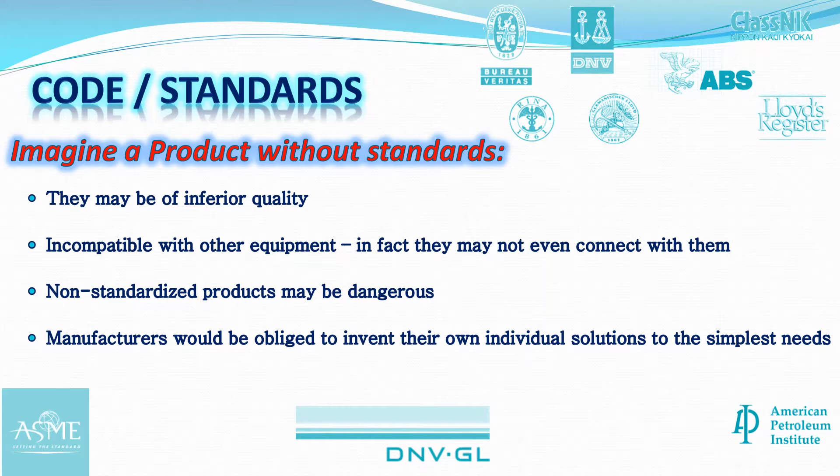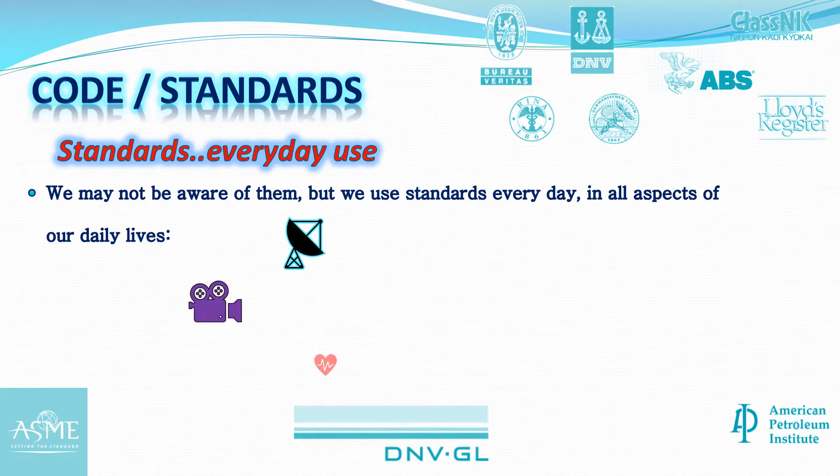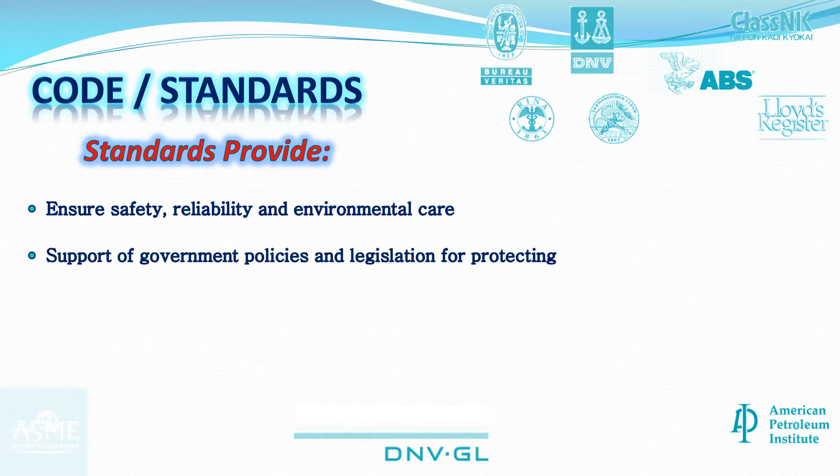We can find the standards in all aspects of our lives, in communications, media, healthcare, food, transport, construction, energy. So, what do standards offer to our products? We will have a safe product that was built according to verified quality. The production process will have less impact on the environment, as it uses proven technology and materials. Governmental bodies usually adopt standards and put legislation to incentivize their application, to protect both users and business interests. The unified product specification opens up market access and provides economies of large-scale production.

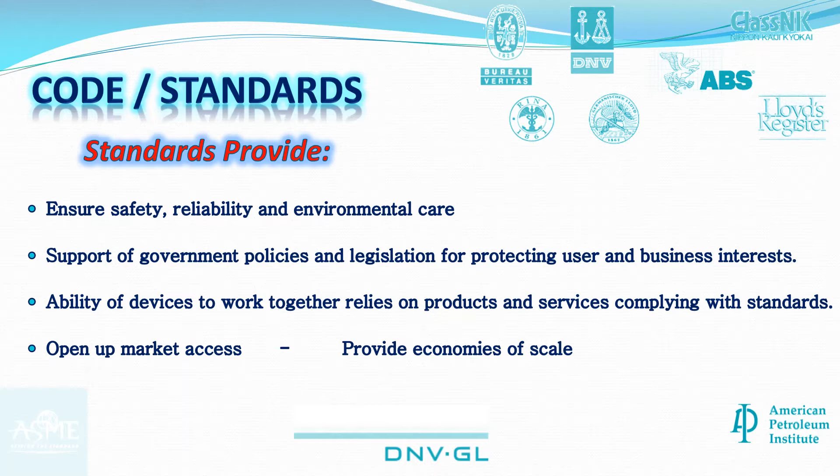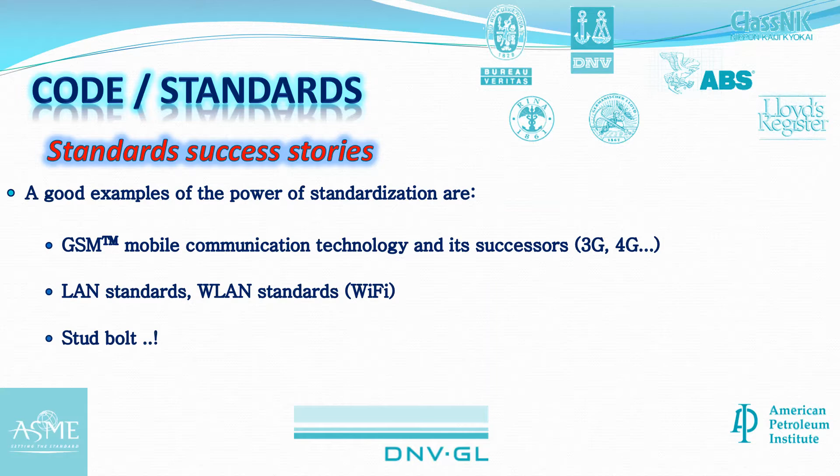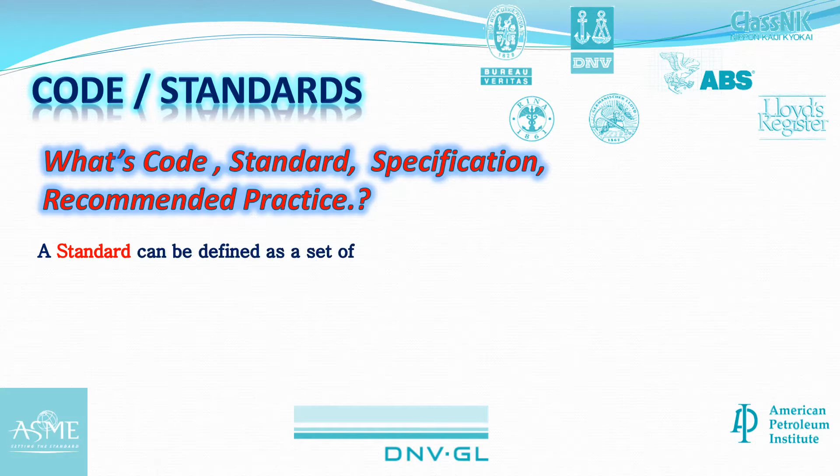Where can we find standard success stories? Mobile communication technologies. WLAN standards, Wi-Fi. Stud bolts and their unified thread system. At this point we have to put a definition to standards. A standard is a set of technical definitions and guidelines that were developed by experts, and function as reproducible instructions for designers, manufacturers, operators, or users of equipment. A standard does not necessarily need to be developed by international bodies such as ISO or ASME. Any organization can set their own standards for internal or external use.

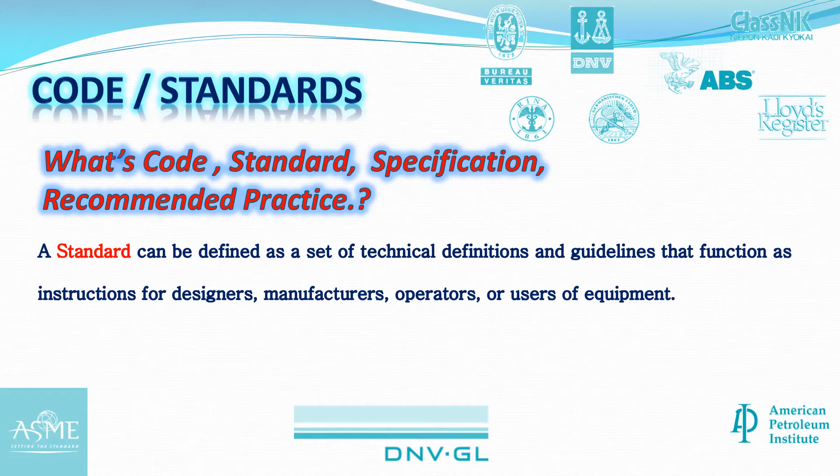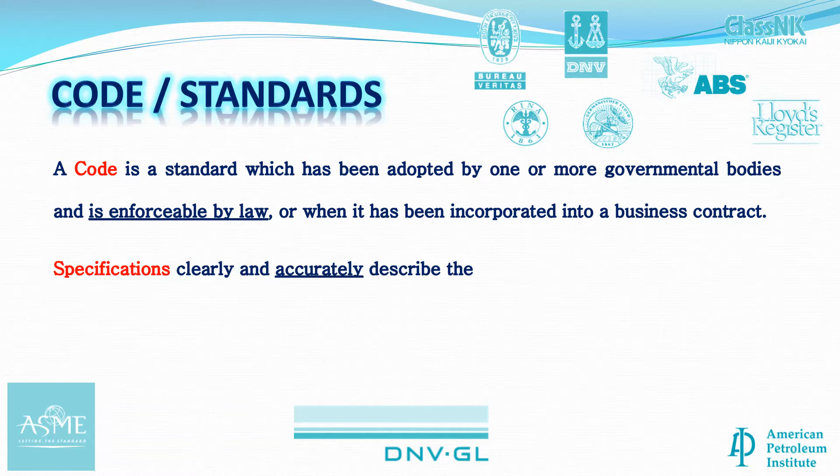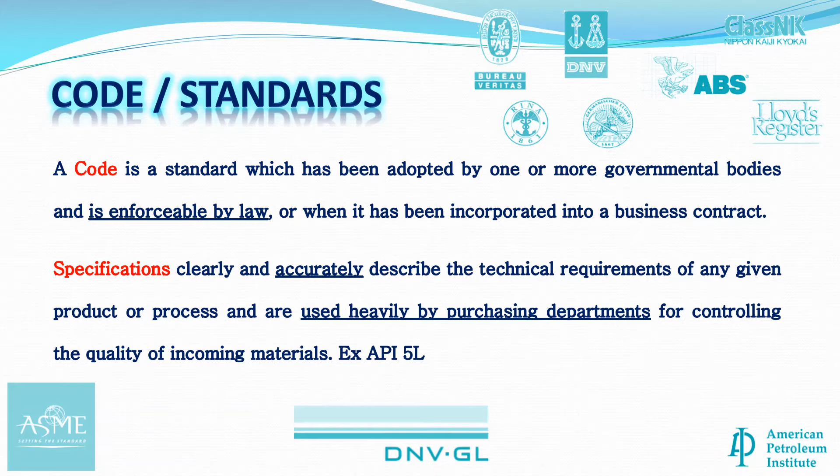What is code? Code is a standard which has been adopted by governmental bodies and is enforced by law. Such as in some countries you have to build any pressure vessel above 6 inches in size according to code. Or when it has been incorporated into a business contract, therefore the contractor is obliged to this code during execution. What are specifications? They are technical requirements that are detailed and precisely described for any given product or process, and are heavily used during purchasing for controlling the quality of the incoming materials.

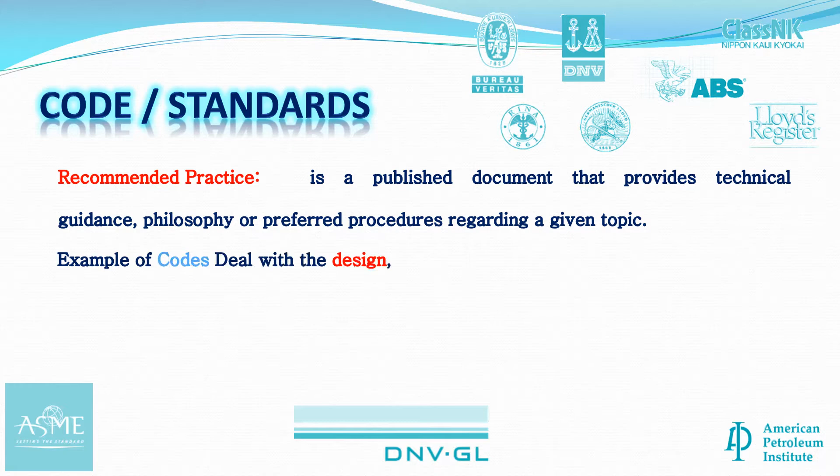Recommended practice is technical guidance and preferred procedures regarding a given topic to improve the process quality. Recommended practice is not obligatory unlike the codes and standards. And these are some examples of codes that are dealing with the design phase and material specification and testing. American Society of Mechanical Engineers, ASME. American Petroleum Institute, API. Det Norsk Veritas, the Norwegian Verification Bureau, DNV. American Society of Non-Destructive Testing, ASNT.

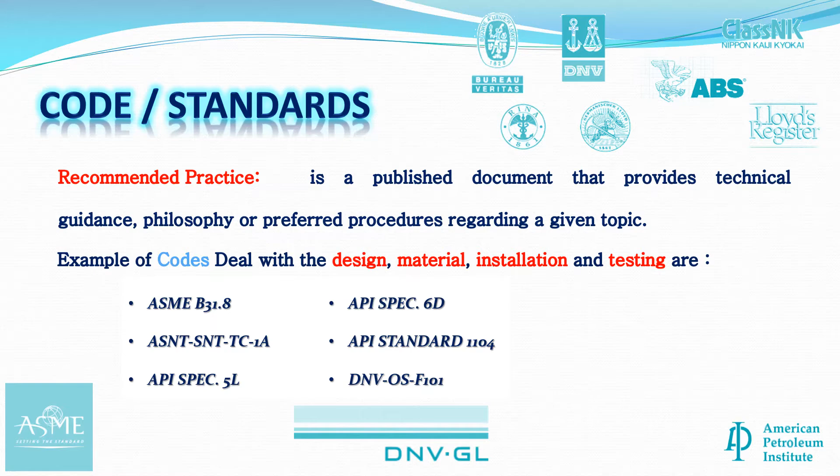Before we go further through the codes and standards most used by piping engineers, we have to know how to use them. The first step is to shortlist the codes that you will use throughout your workflow, of course with the advice of a skilled colleague.

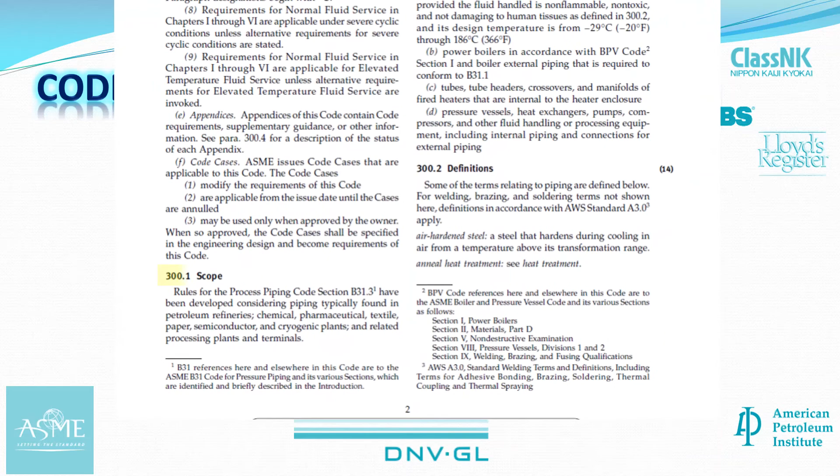The second issue, shall we memorize all these standards? The answer is surely no, as most of these publications are being updated and revised regularly. For example, every 2 years the American Society of Mechanical Engineers issues an update to the Boiler and Pressure Vessel Code. What you have to do is to review the scope and contents of these codes, which is typically 1 page, and it is not subject to changes during code updates. Learn how to navigate through the code and to find out quickly the info you are searching for and where it is located, in which chapter or article.

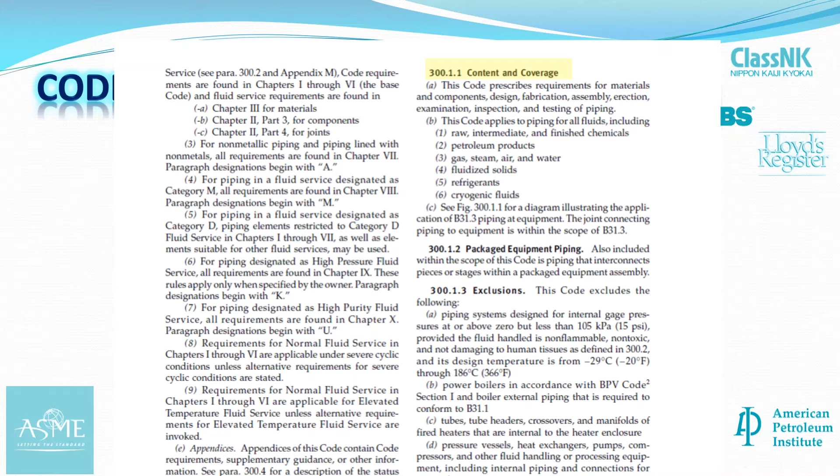The first code we shall review is from the American Society of Mechanical Engineers (ASME) Boiler Code Committee, which was formed in 1911. This committee was put in place after several serious explosions in the States during 1905, 1906. The first publication of the ASME Code was issued in 1914, whose name was Rules for the Construction of Stationary Boilers and the Allowable Working Pressures. The Boiler and Pressure Vessel Code has grown over the decades to include 13 sections that regulate the design and construction of boilers, pressure vessels and their components.

These sections start with Section 1, Rules for Construction of Power Boilers. Section 2, Materials, with its 4 parts. Section 5, Non-Destructive Examinations. Section 8, Rules for Construction of Pressure Vessels, 3 divisions. Section 9, Welding and Brazing Qualifications, and ending with Section 13, Rules for Overpressure Protection, along with code cases.

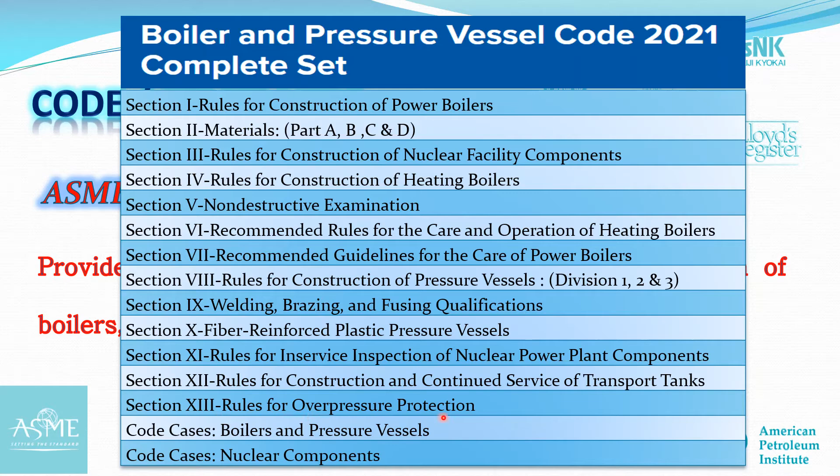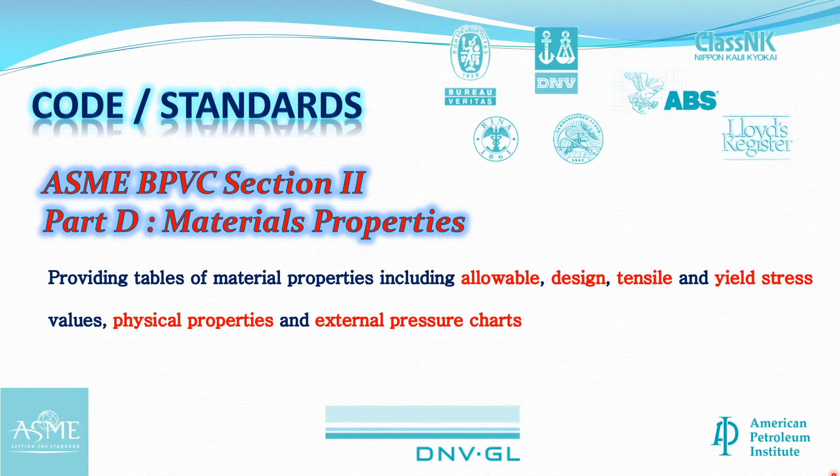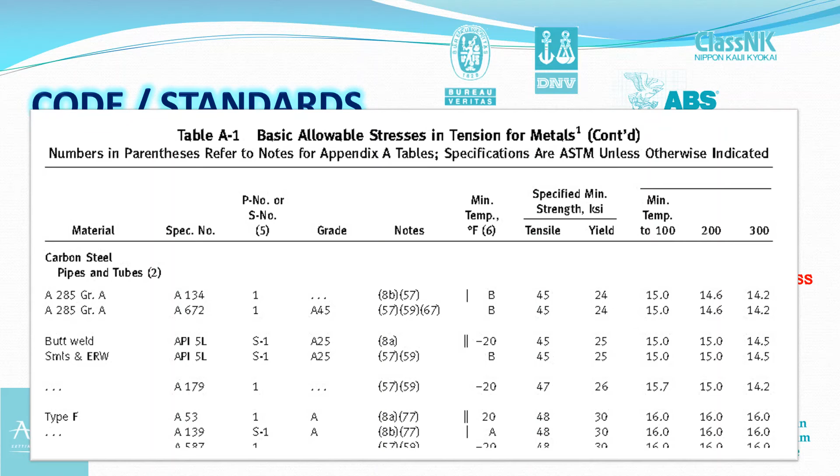Let's focus on Section 2, Part D, Material Properties. It provides tables of material properties including physical properties, external pressure charts and stress values that act as reference for other code sections. And this is Table A-1 that provides allowable stresses for ferrous materials. As you can see, it lists material specification number and grade, tensile strength, yield strength and other material properties that are used in various sections of the Boiler and Pressure Vessel Code.

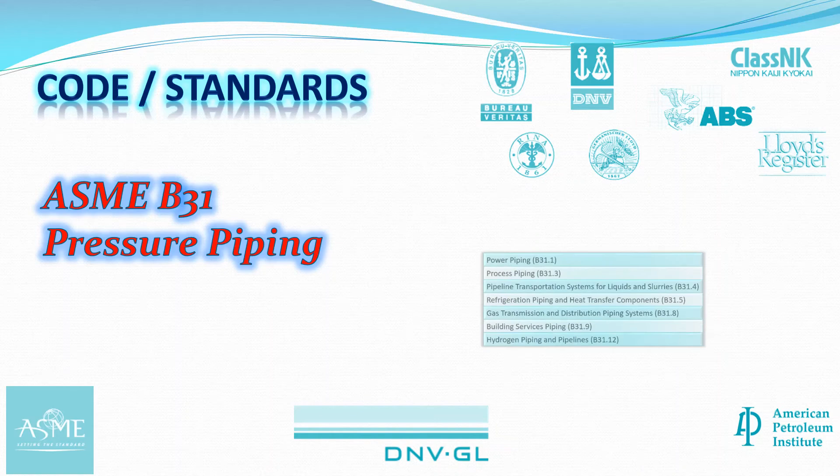In order to keep the code up to date with current developments in piping design, welding and new material specifications, and the increasing severity of service conditions, ASME developed the B31 Code for Pressure Piping since 1935. The Code for Pressure Piping, B31, covers several industries and consists of Power Piping, B31.1, Process Piping, B31.3, Pipeline Transportation Systems for Liquids and Slurries, B31.4, Refrigeration Piping and Heat Transfer Components, B31.5, Gas Transmission and Distribution Piping Systems, B31.8, Building Services Piping, B31.9, Hydrogen Piping and Pipelines, B31.12.

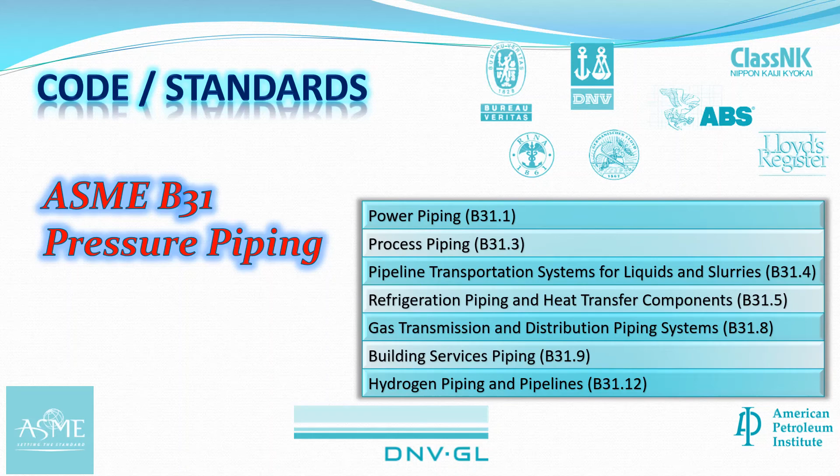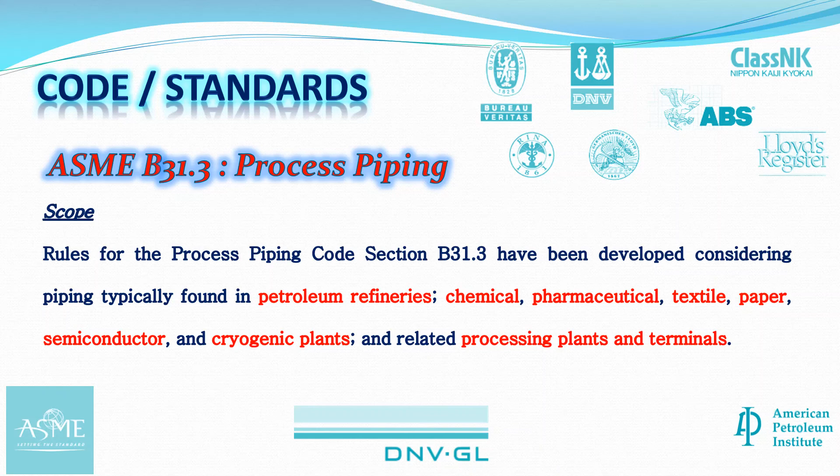Let's review B31.3 Process Piping as an example. As agreed, the first approach is to read the scope of the code. It is rules for the process piping typically found in petroleum refineries, chemical, pharmaceutical, textile, paper, semiconductor, and cryogenic plants, and related processing plants and terminals. The following task is to analyze the content and coverage. This code prescribes requirements for materials and components, design, fabrication, assembly, erection, examination, inspection, and testing of piping.

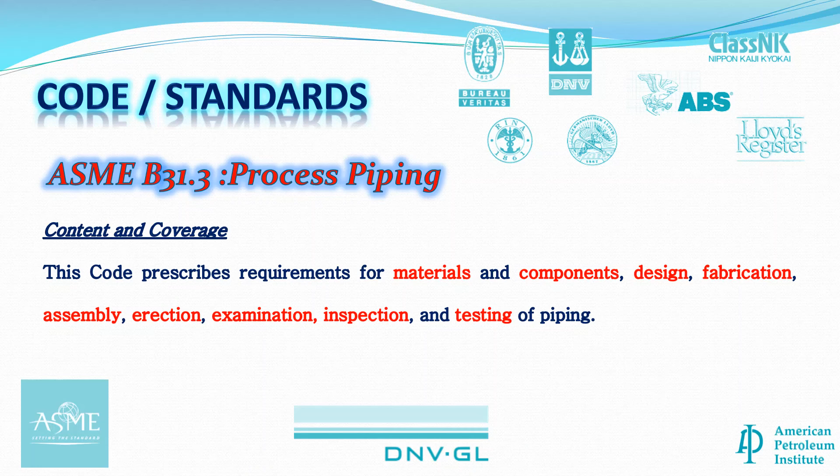At this moment a question popped up, and I will wait for the answers in the comments section below. Is piping beyond the outlet of the customer's meter set assembly included in the scope of B31.3? I can give you a hint for the answer. Kindly review the previous video, definitions and terminologies.

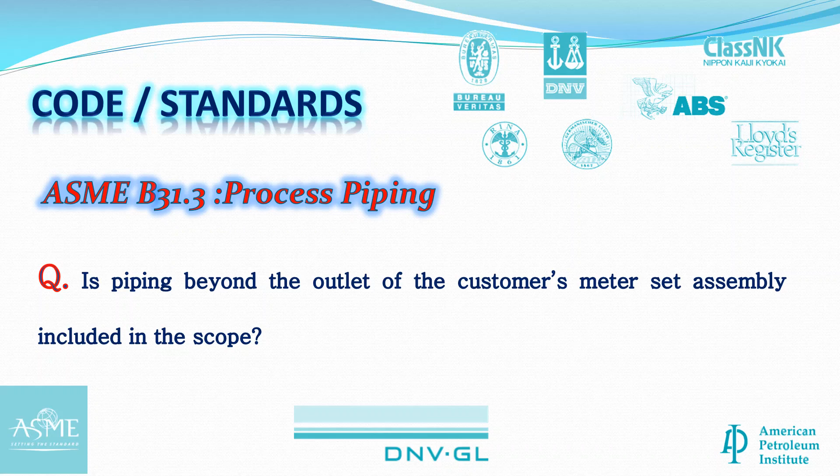It shall take hours and hours to review only the shortlisted codes for the piping engineer. But as advice, I will recommend the below list to review as we did previously. Read the scope, content, coverage and exclusion articles and give me your feedback and let's discuss.